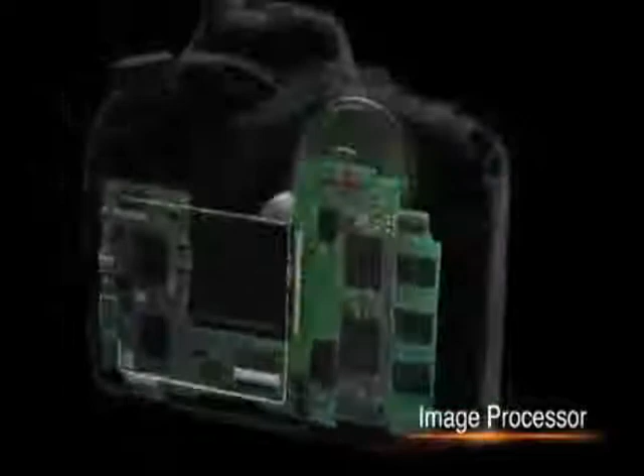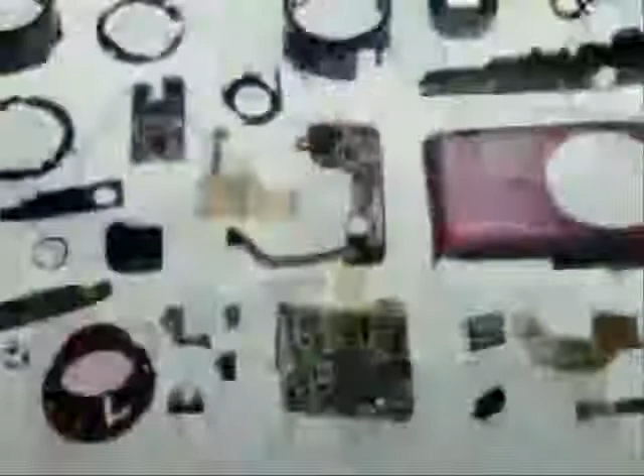Digital cameras are made up of many parts. They must work in precise synchronization to produce good photographs. This feat is made possible by Canon's camera manufacturing expertise.

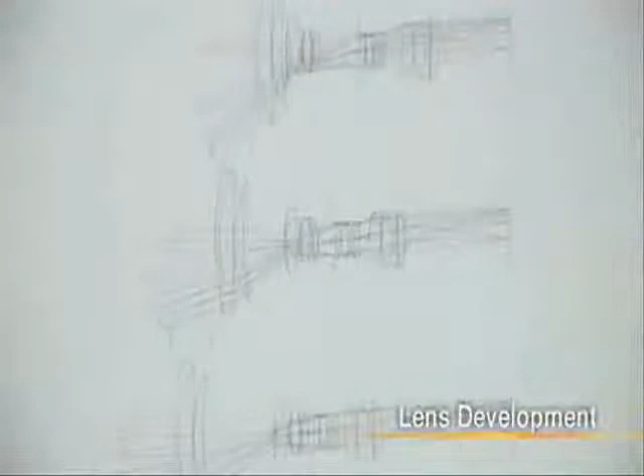To capture light without distortion, multiple lenses must be combined and precisely aligned. To design a lens, Canon conducts tens of thousands of simulations involving everything from the type of materials used to the order and arrangement of lens components. Next, 3D computer-aided design is used to design the entire lens.

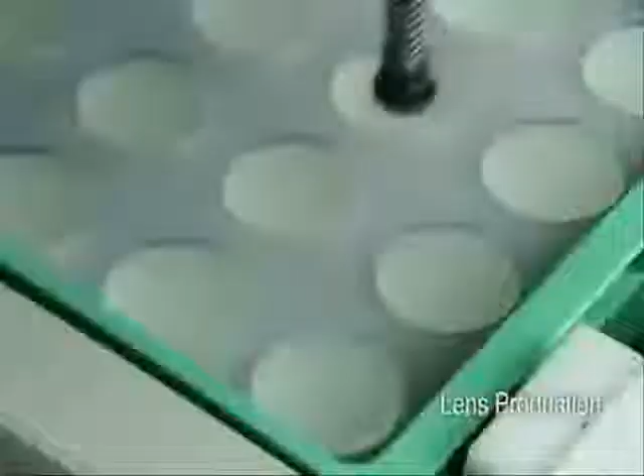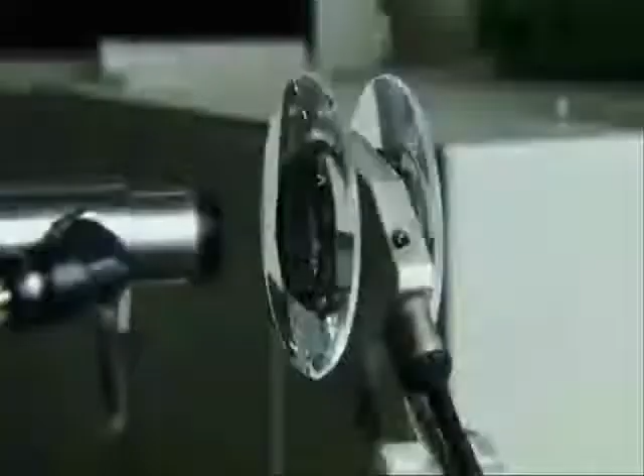Lens production begins with the polishing of each piece of glass. Essential know-how regarding polishing methods, polishing times, and polishing abrasives can only be gained through many years of trial and error. Lenses are polished thousands of times and then washed.

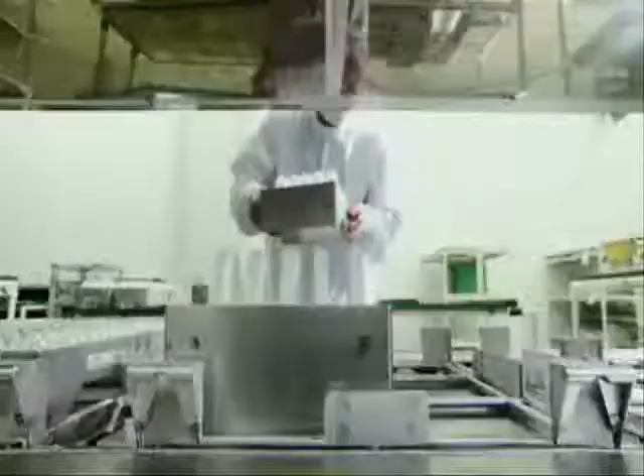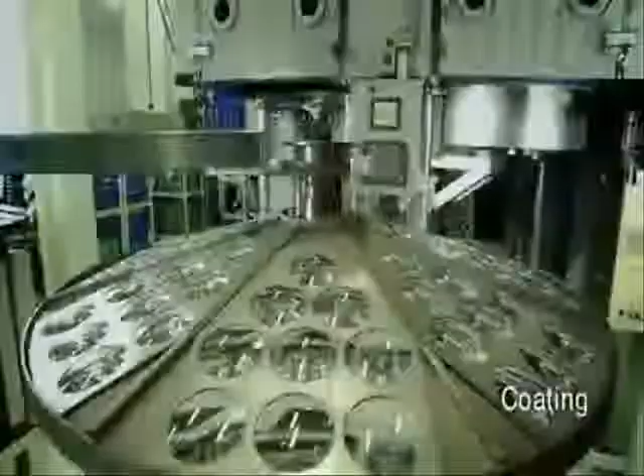Following careful inspection, the lens surface is coated to reduce reflection and protect against scratching. The finished lens is so precise that if enlarged to the size of the Tokyo Dome Stadium, the margin of error would be less than the thickness of a business card.

Canon's polishing tools are made by master craftsmen with decades of experience. It's here that traditional craftsmanship meets leading-edge technology. Canon innovation is the history of the camera lens.

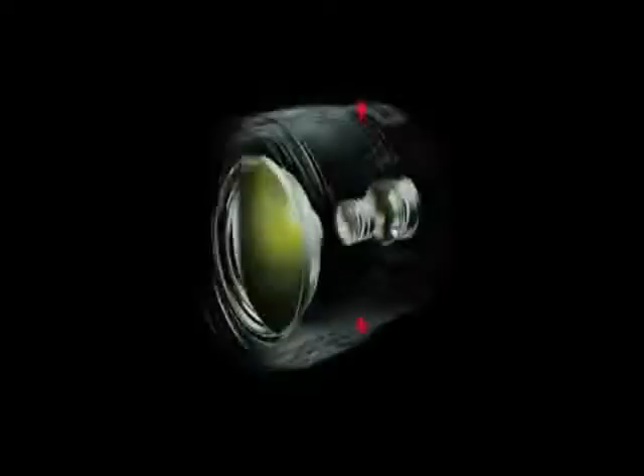Canon mass-produced fluorite, an ideal lens material. Introduced aspherical lenses. Achieved the first practical application of an ultrasonic motor, and developed optical image stabilization technology. Canon's breakthroughs in lens technology have redefined photography time and time again. In the ongoing pursuit of the ideal lens, Canon illuminates photography for future generations.

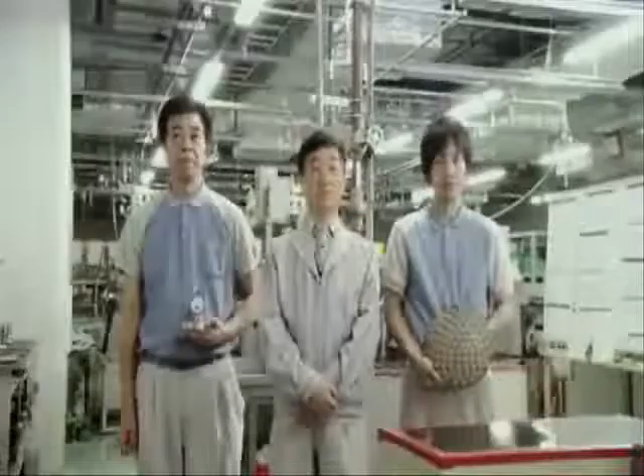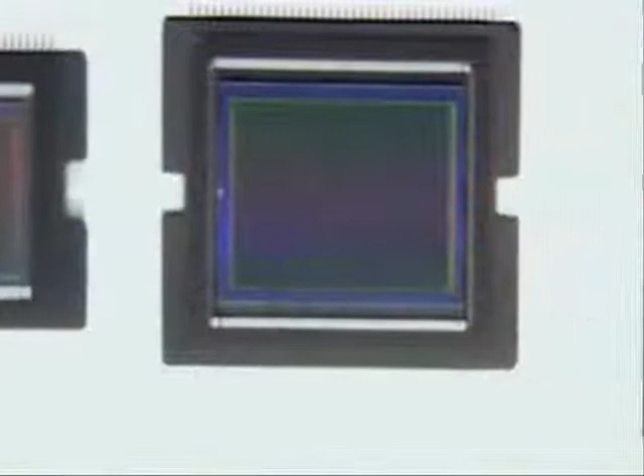The image sensor converts light entering through the lens into electrical signals. Canon applies its original technologies and know-how to develop high-precision image sensors that offer high-speed processing and low power consumption. Each pixel stores tens of thousands of electrons. This has made possible a digital revolution in astrophotography.

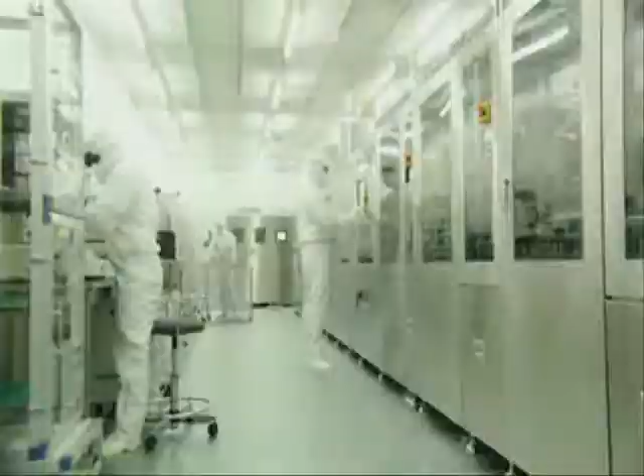Canon produces its image sensors in a clean room environment in which even a single speck of dust is unacceptable, and the sensors do not come into contact with outside air. Using a method similar to semiconductor chip production, micrometer order circuits are etched onto large disc-like silicon wafers. Each sensor is cut from the wafer.

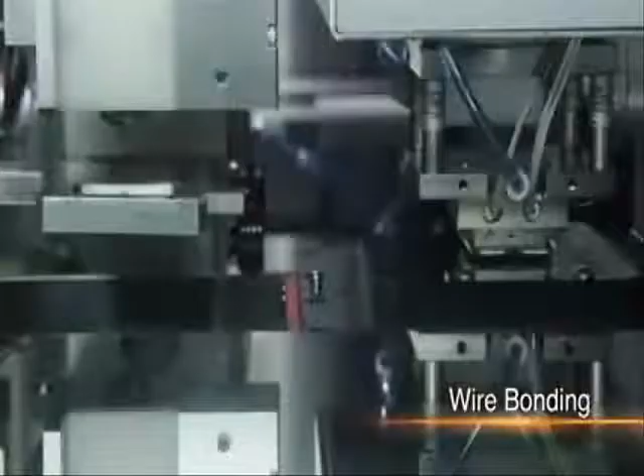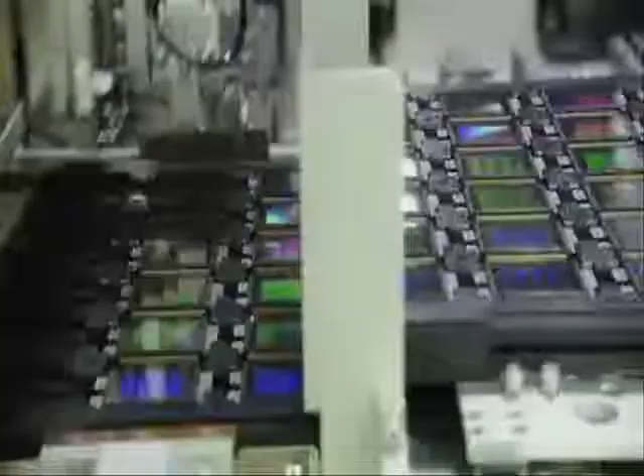After bonding and other processes, the sensor unit is complete. Canon's entirely automated production process ensures that each delicate image sensor meets the strictest standards of quality. Canon has nurtured its sensor technology since the beginning, and now it's flourishing.

After the image sensor converts the image data into electrical signals, the image processor processes it. Canon's 70 years of camera-making experience led to the creation of the powerful Digic image processor. Digic narrows the gap between human color perception and a camera's objective measurement of color, producing colors beautiful to the human eye.

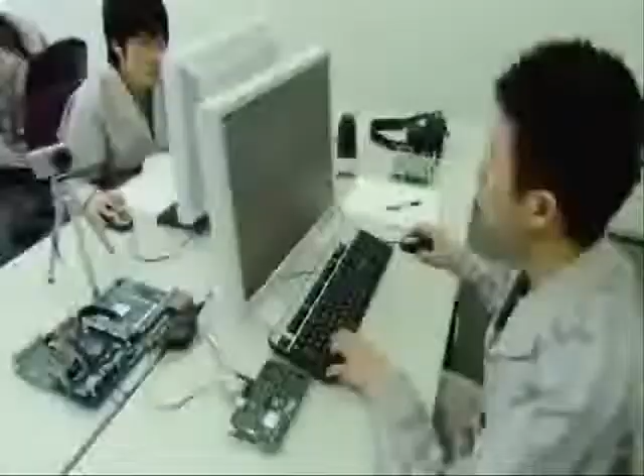Canon's research into seamless communication between cameras and printers is incorporated into Digic's circuitry. Today's digital cameras can recognize facial expressions such as smiles and winks, and identify over 30 faces at once.

Canon digital SLR cameras support high-speed continuous shooting, and were first to make possible the shooting of full high-definition movies, thanks to their ability to instantly process large amounts of data. To create high-precision images, Digic performs countless processes, all in the instant you press the shutter.

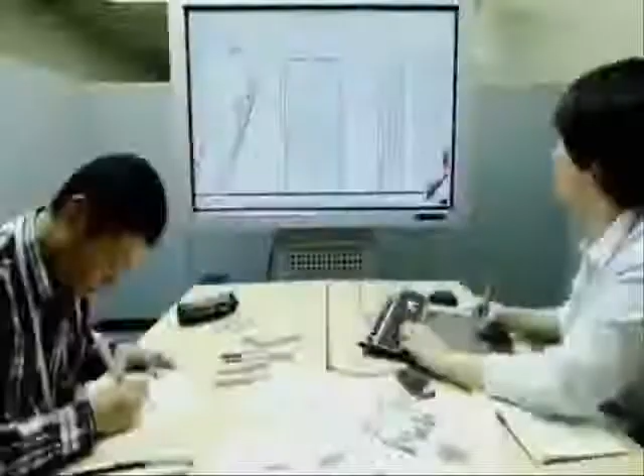How are digital cameras designed and developed? First, a designer sketches the body of the camera. A 3D model is then created on a computer and the details are worked out. The color and texture of the different parts and the camera's overall ease of use are then considered.

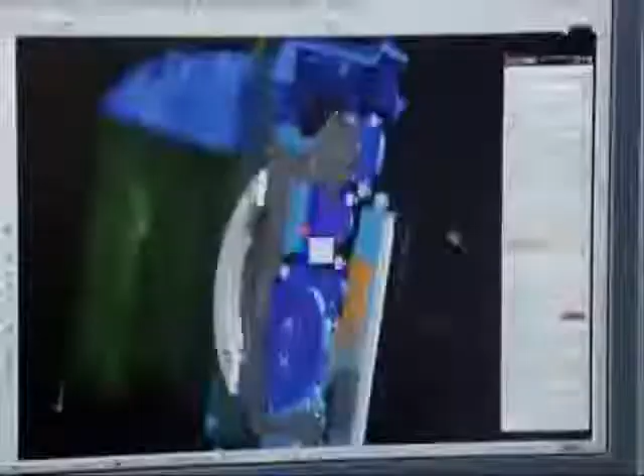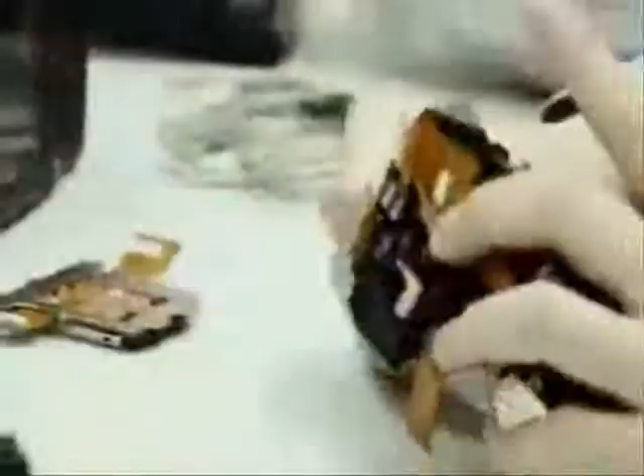The data is then passed on to the development team. Designing on a computer, the team incorporates various features and functions, striving to achieve a body design free of waste. Canon employs 3D computer-aided design to speed up the process by reducing the need for trial production and prototypes. After repeated verifications, a digital camera is developed.

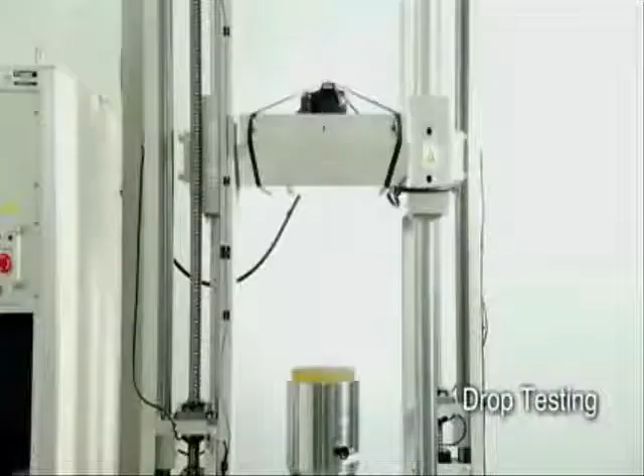But before being commercialized, it undergoes rigorous testing. It's dropped over and over, and its buttons are pressed tens of thousands of times until Canon believes it has a finished product. Now the camera's ready for production.

Various camera parts which have been developed and produced at different locations are transported to this factory for assembly. Efficient production requires the delivery of a precise number of parts several times every working day. Each delivery arrives just in time for assembly.

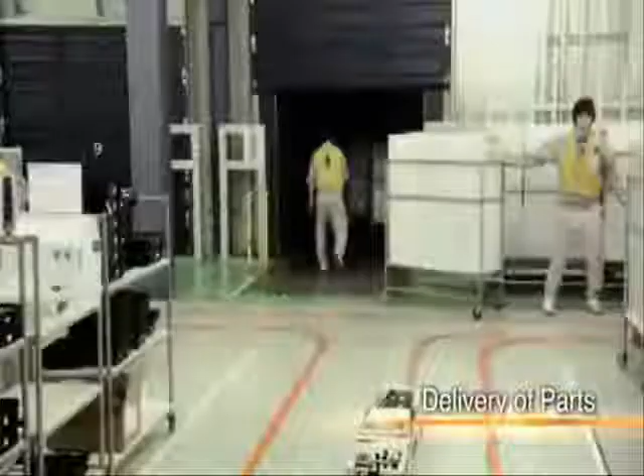The production process is centrally managed, and progress can be confirmed from anywhere in the factory, a system that supports the smooth supply of parts. The final stage in the production process is assembly.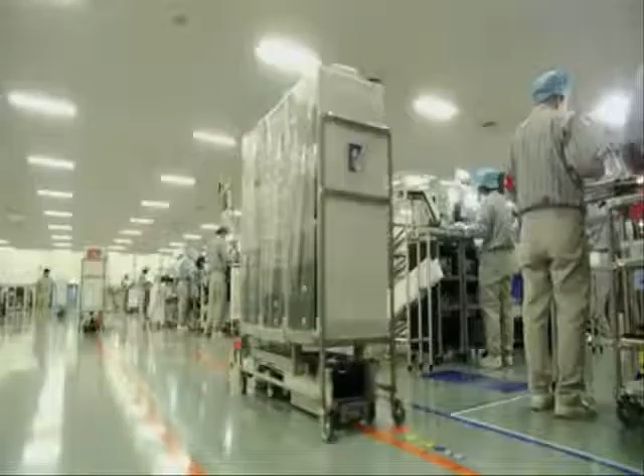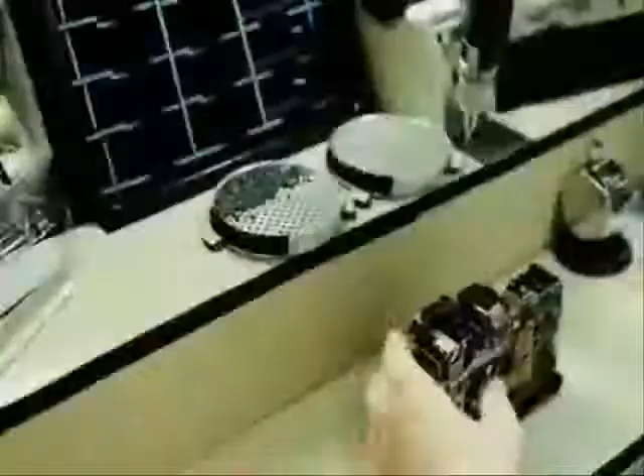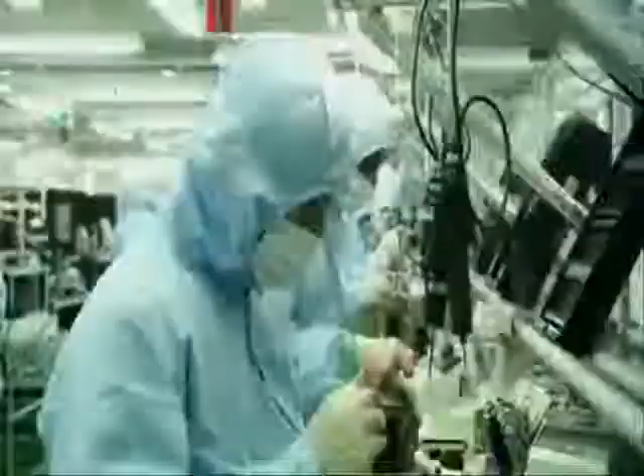Canon uses the cell production system to assemble cameras into finished products. In the cell production system, assembly workers are grouped in cells, which can respond flexibly to the production demands of various global specifications. Digital SLR cameras are carefully assembled by cells inside a clean room.

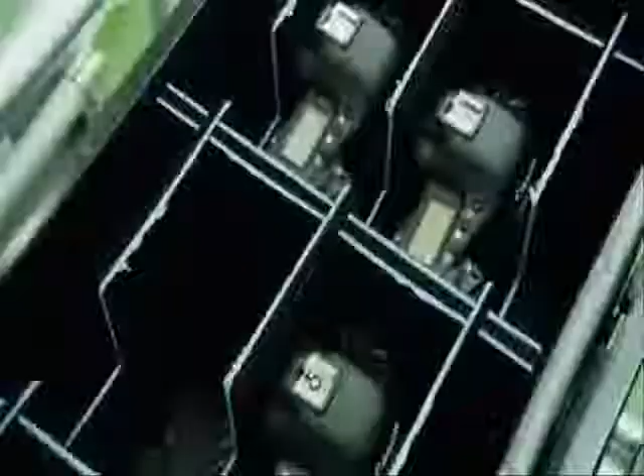The superior quality of Canon digital cameras is made possible by the company's advanced technologies and production systems.

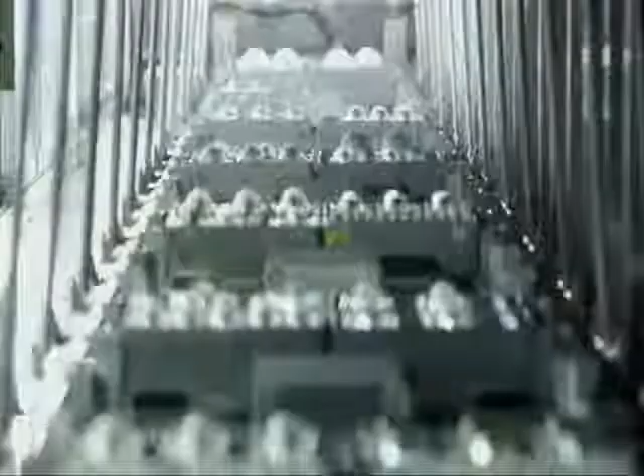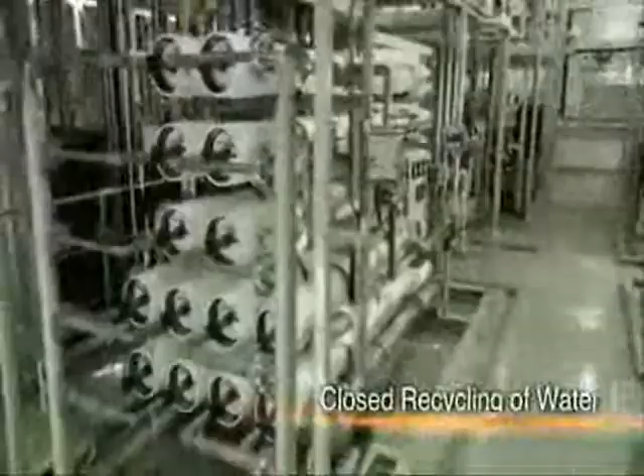Conscious of protecting biological diversity, Canon sets stringent environmental standards. Through green procurement, Canon only uses parts with little environmental impact. The company recycles water at all of its factories. This is particularly significant during lens production, which requires large amounts of water. All water used for industrial purposes is purified at an on-site recycling facility and reused.

Canon strives to reduce the resources it uses for packaging. The company has adopted a modal shift in its transportation methods in order to curb CO2 emissions. It's with such care and consideration that Canon products are shipped to customers around the world.

Right now, somewhere in the world, a Canon digital camera is being delivered to a customer who will use it to capture precious moments. With leading-edge technologies and superior performance, Canon will continue to deliver the world's most trusted cameras.